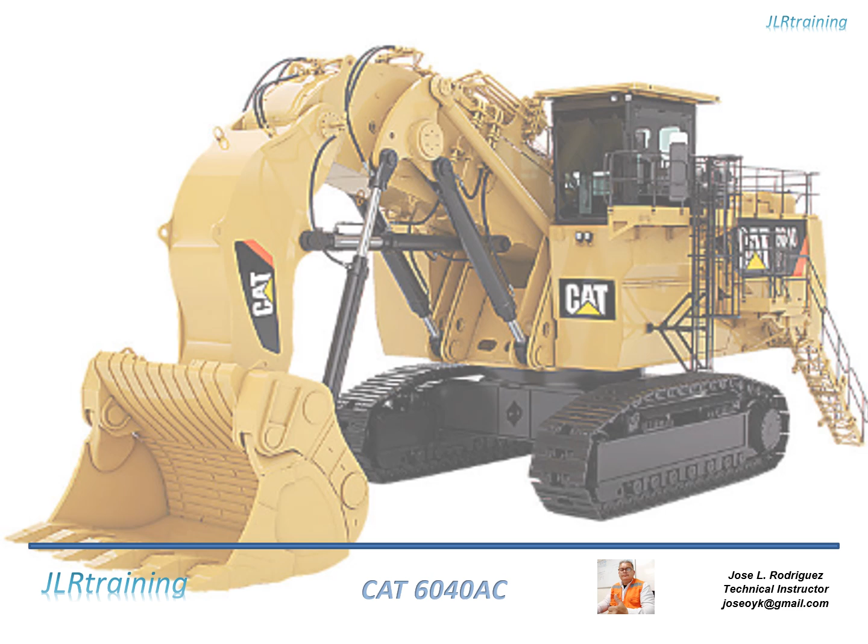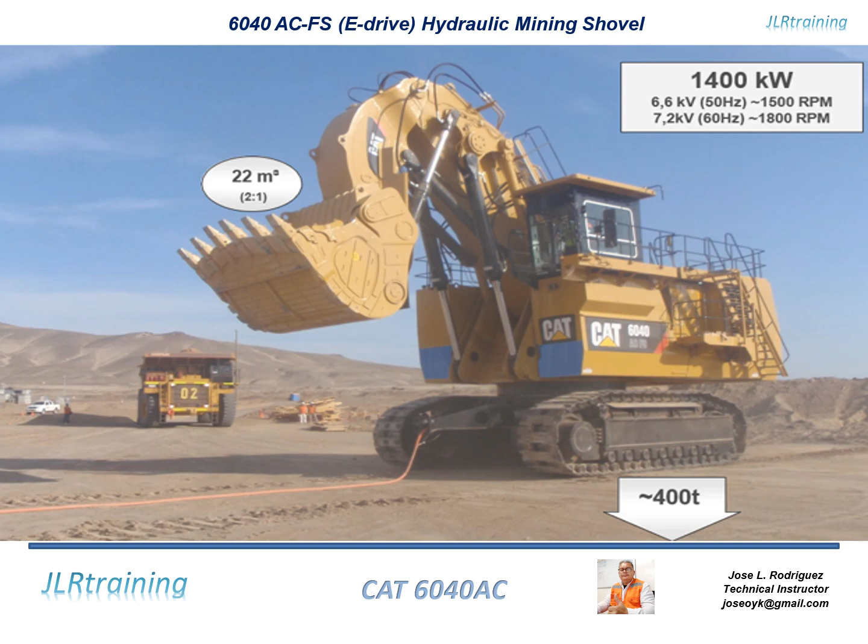This video explains about the Caterpillar 6040AC excavator, pumps, tanks and drive controller. 6040AC, FS, E-drive hydraulic mining shovel. Working dimensions.

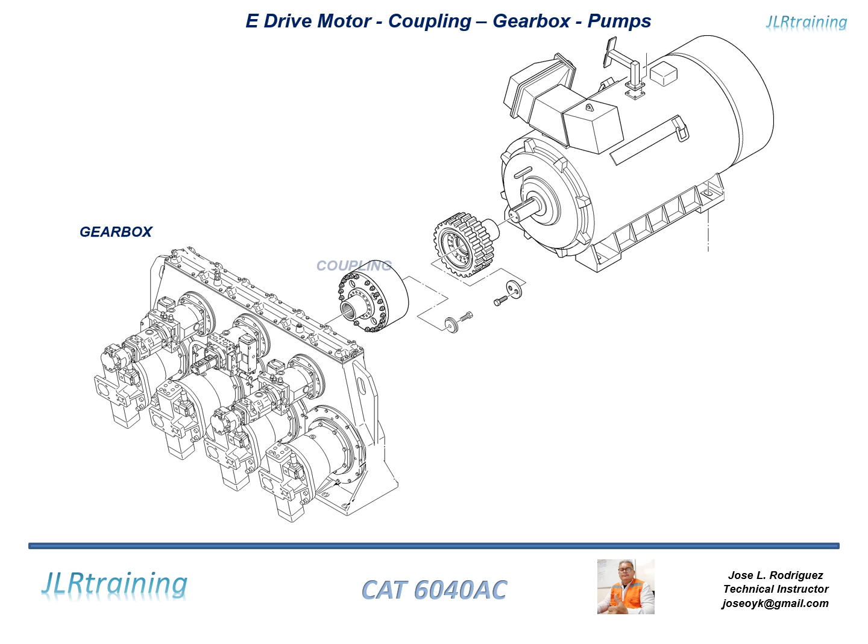E-drive motor, coupling gearbox, pumps. Gearbox and pumps.

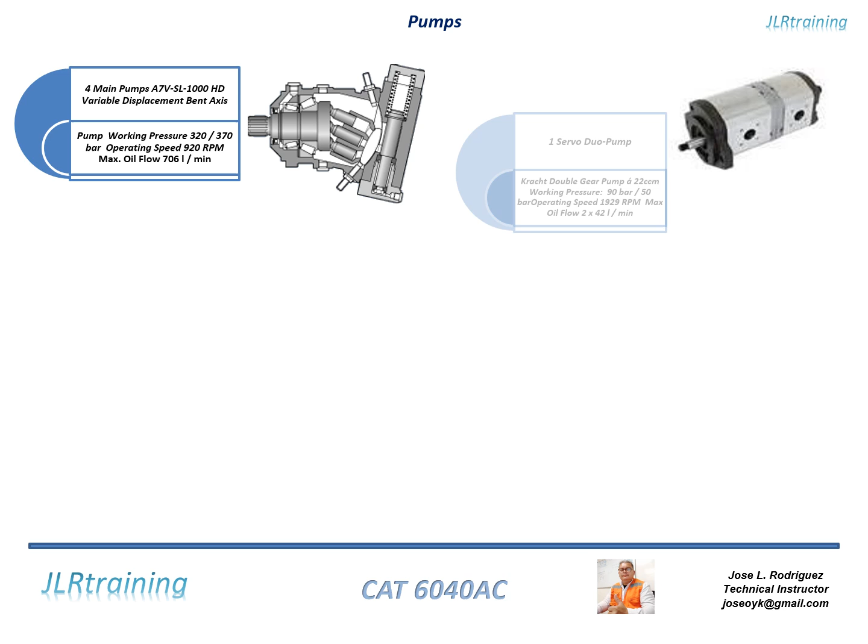Main module. It is the main module of the upper structure. In it is the electric motor, which generates the base power that is transmitted to the pump gearboxes, and the pump gearboxes generate the energy transmitted to drive the hydraulic pumps. The movement of the hydraulic pumps is produced to perform the operational movements.

This motor provides a power output of 1400 kilowatts. This motor needs a power supply of 7200 volts for its operation.

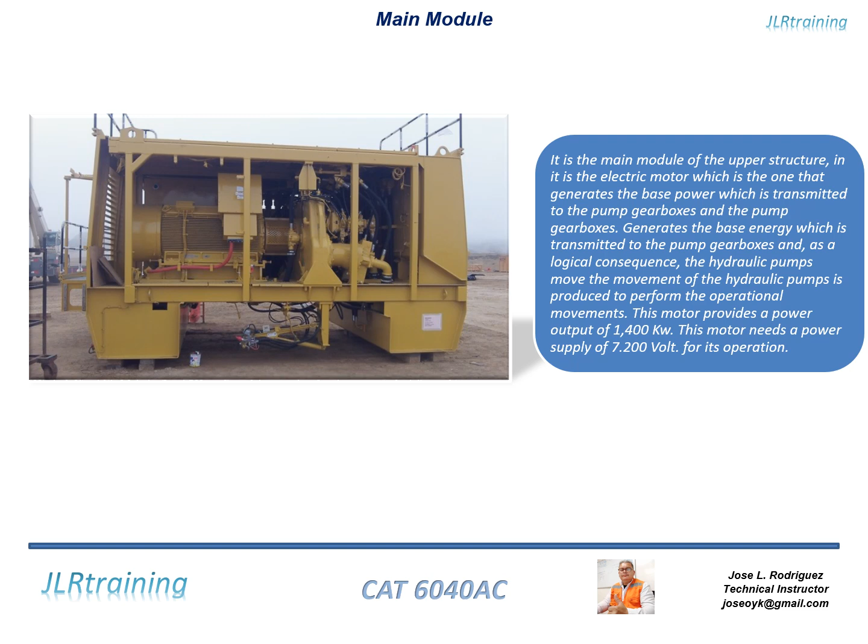Electric motor gearbox. Coupled to the electric motor by means of a coupling is a gearbox called a pump reduction box. As its name says, to this box are coupled all the pumps for the generation of hydraulic power. There are 4 main pumps that perform all the operational movements except the rotation, 3 turning pumps, 2 pumps to send hydraulic oil for cooling, and 1 servo pressure pump.

These boxes are lubricated and cooled by means of gear-type oil, whose characteristics are indicated in the maintenance manual, and the quantity is 149 liters. On its sides there are some rods to verify the level of this oil. To lubricate and cool this box has a pump that circulates the oil to maintain an ideal working temperature.

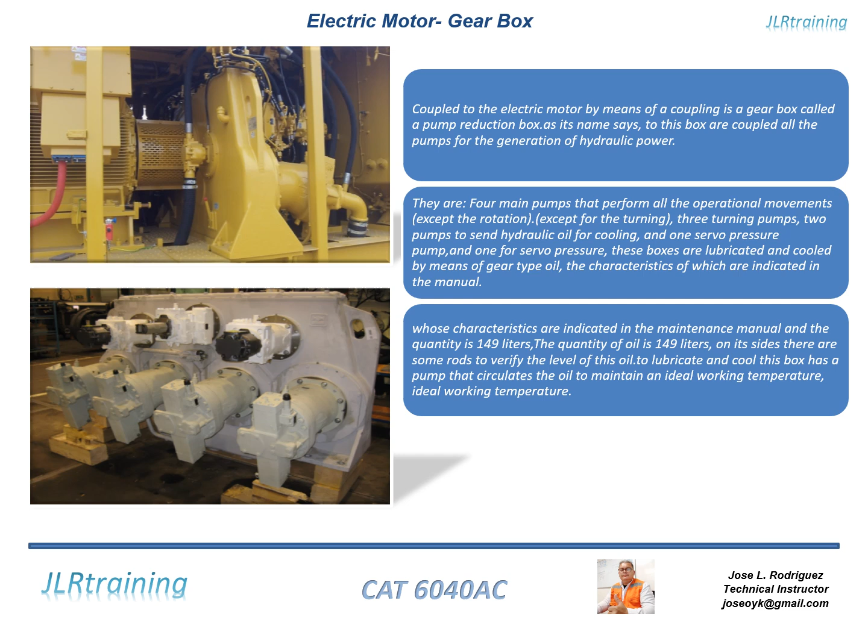Electric drive Siemens.

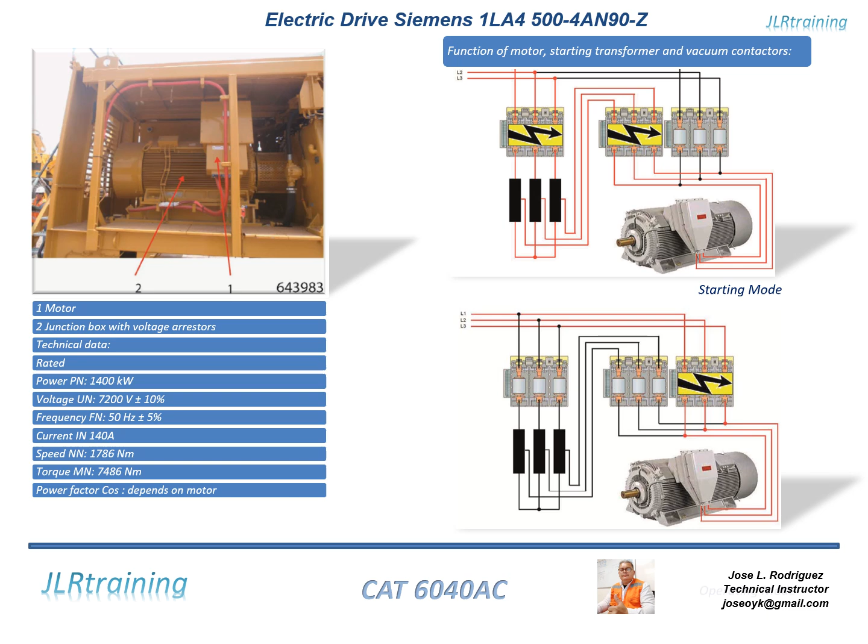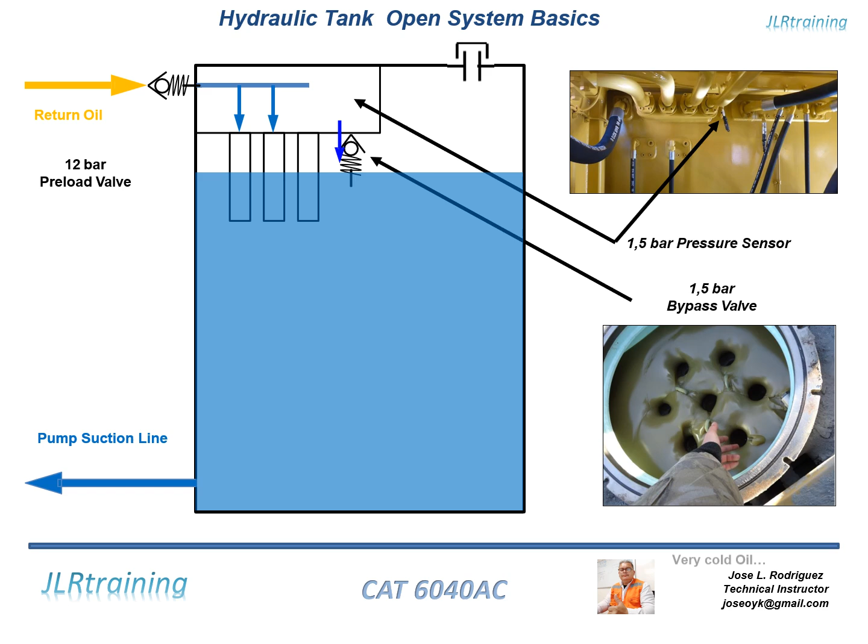Hydraulic tank open system basics. Tank.

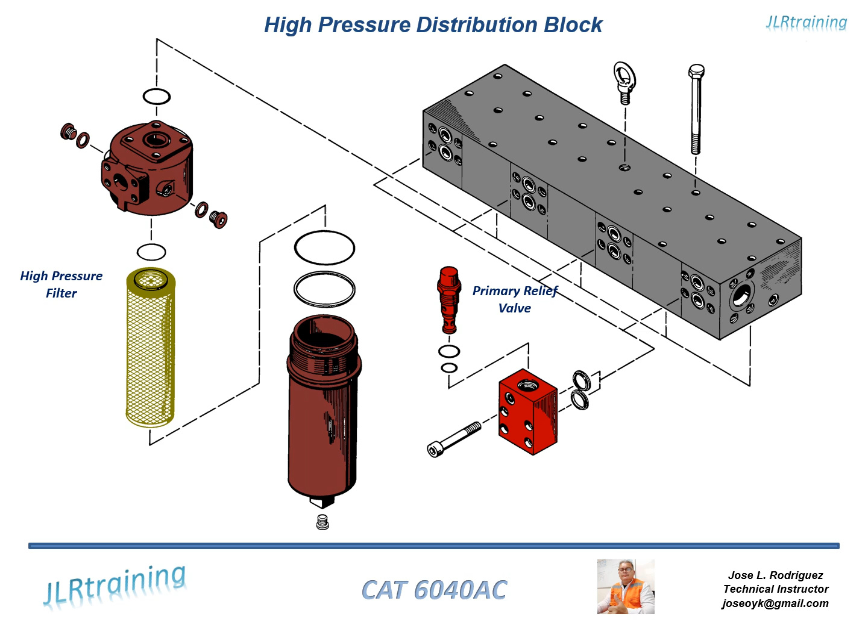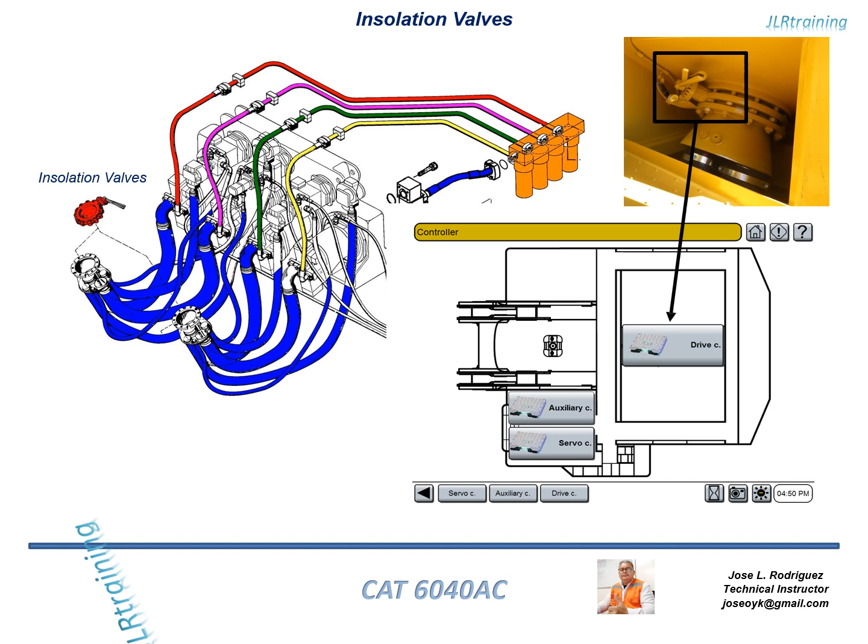High pressure distribution block. Isolation valves. Main pump.

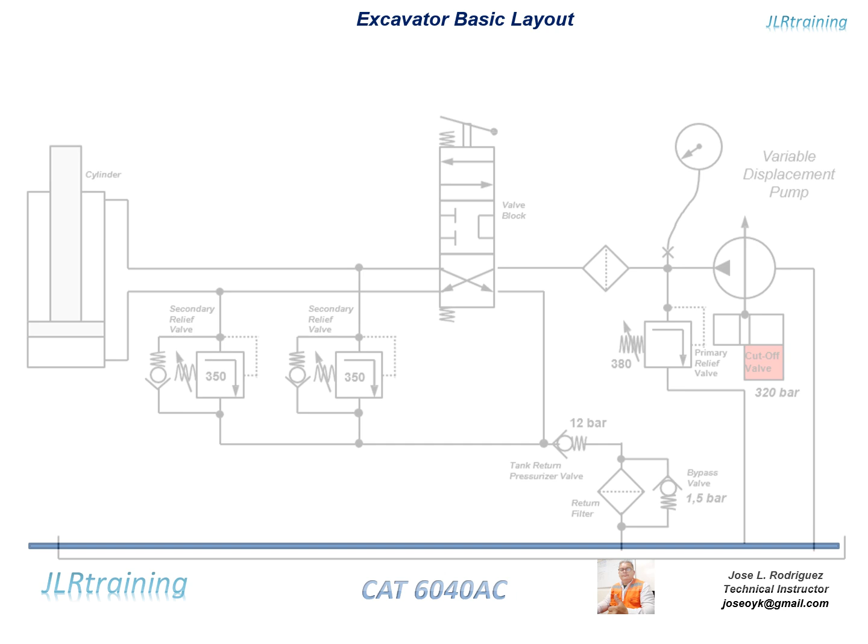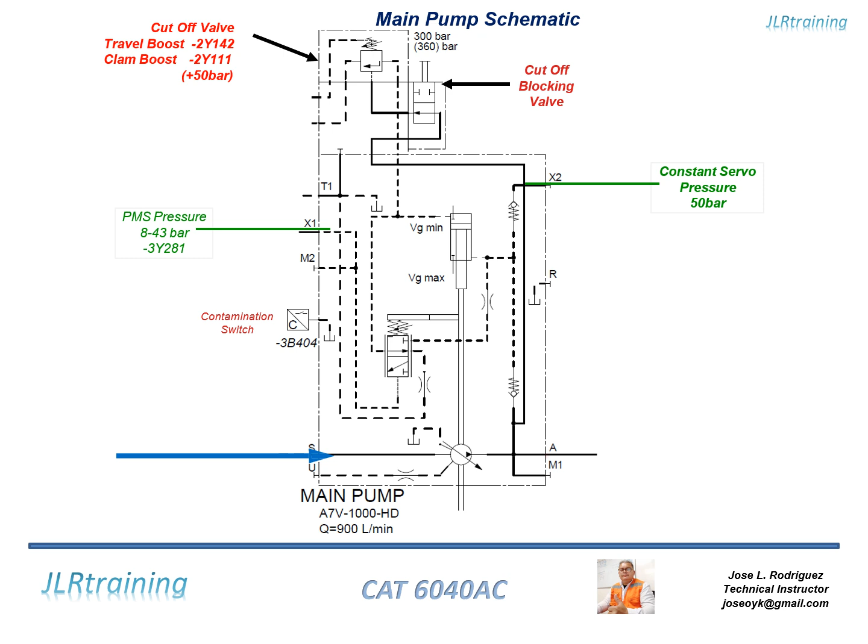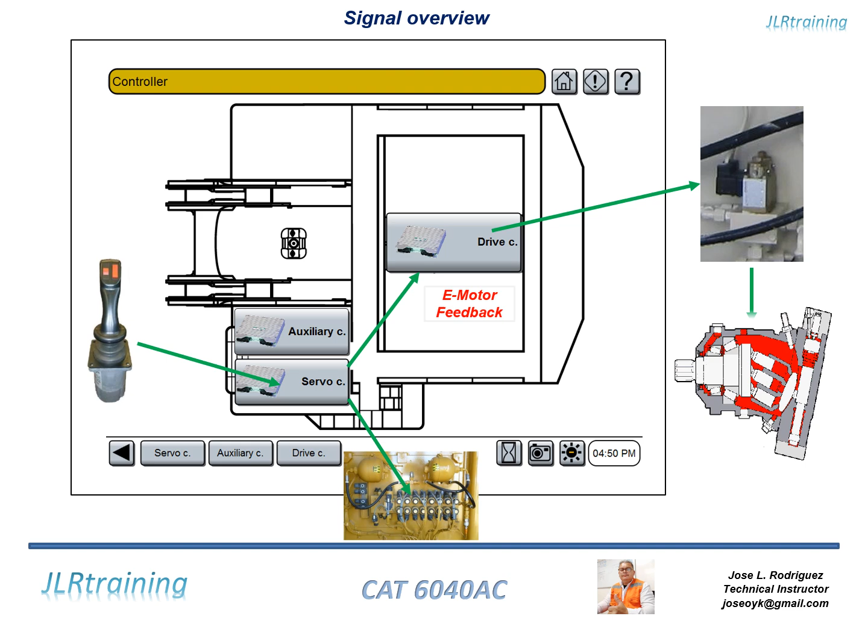Excavator basic layout. Main pump schematic. Signal overview. PMS pump management system.

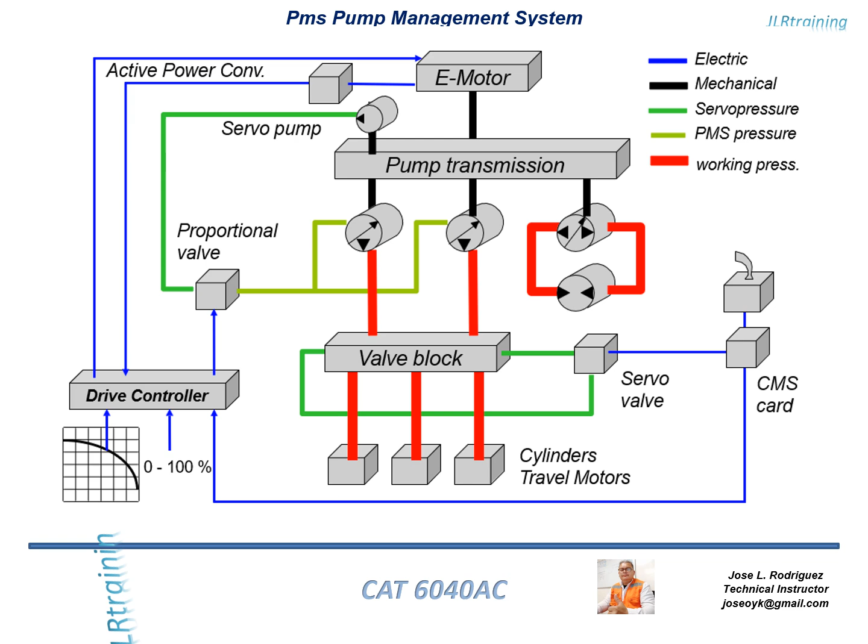Main pump in neutral. On startup of the motor, servo oil is delivered to the main pump proportional valve 3Y281 and the X2 port on the main pumps. The servo oil passes over the check valve and into the rod side of the control piston, assisting the spring and keeping the pump in neutral for startup and low idle.

With the control functions not operated, the pump management system supplies the proportional valve 3Y281 with 150 mA. This opens the proportional valve and allows 8 bars pressure to pass through into the X1 port of the main pump and onto the end of the control spool. 8 bars is not sufficient pressure to overcome the spring, so the spool remains in the closed position.

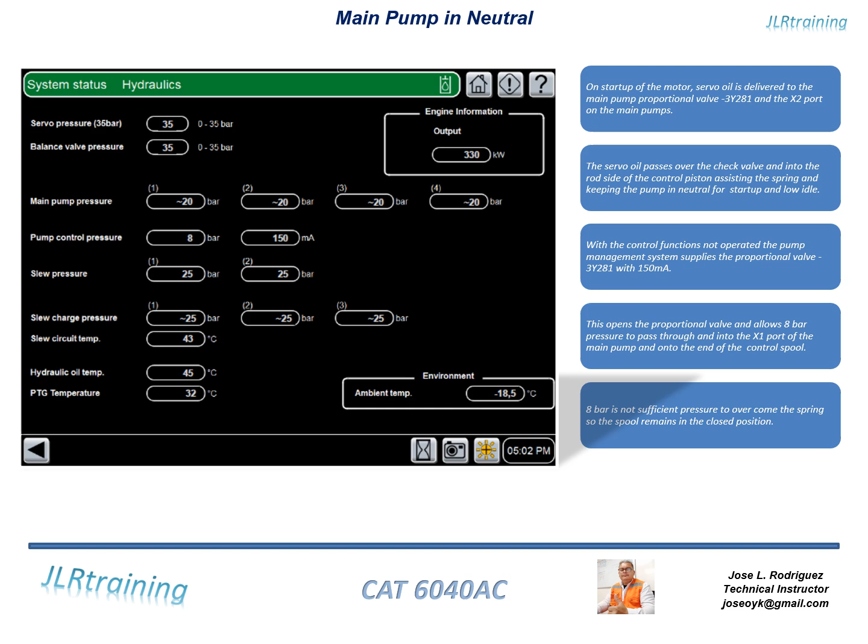Main pump in flow. With the motor running, the main pump is supplied with 50 bar servo oil at the X2 port and the pump is in neutral or zero flow. The proportional valve 3Y281 is also supplied with 50 bar servo. As the operator summons a function, the drive controller increases the mA signal, PMS current 225-820 mA, to the proportional valve.

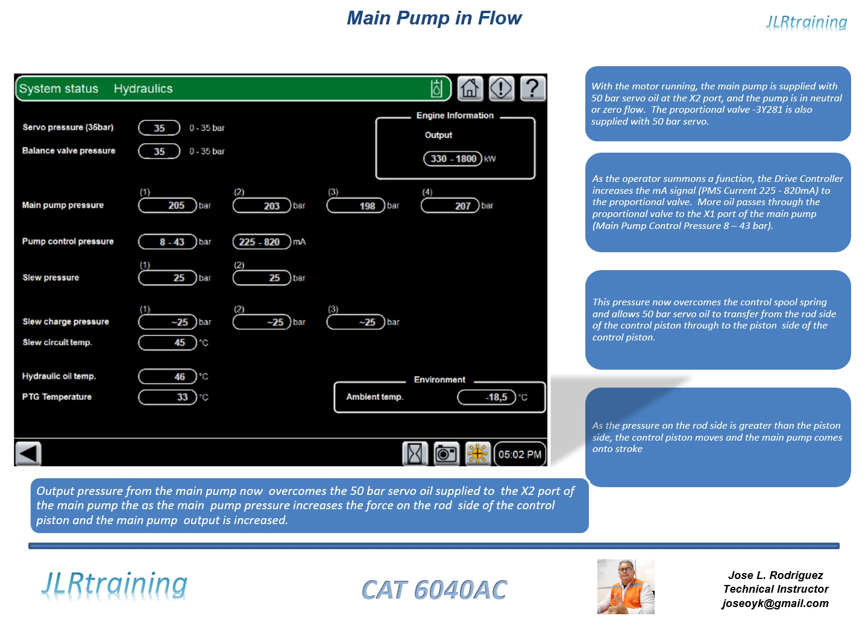The main pump comes onto stroke. Output pressure from the main pump now overcomes the 50 bar servo oil supplied to the X2 port of the main pump. As the main pump pressure increases, the force on the rod side of the control piston and the main pump output is increased.

Main pump pressure cutoff. A pressure cutoff valve is fitted to each of the main pumps for the purpose of limiting the maximum main pump output pressure to 320 bars for all working equipment functions and 370 bars for the travel functions.

The output pressure from the main pump is sensed at the pressure cutoff valve. The pressure cutoff valve is held closed by the spring, which is set to 320 bars. As the hydraulic system comes under load, the pressure in the output from the main pump starts to increase. When the output pressure reaches 320 bars, it overcomes the spring on the pressure cutoff valve.

The pressure cutoff valve now opens and high pressure oil is directed from the piston side of the control piston to tank. The rod side of the control piston is also vented to tank, however at a more reduced rate due to the orifice. The orifice on the rod side of the control piston ensures a pressure differential between the piston side and the rod side, allowing the pump to destroke.

The main pump is destroked, allowing the output flow to decrease to zero, but the maximum pressure of 320 bars is maintained. As soon as the load is removed from the hydraulic system, the output pressure drops and the pressure cutoff valve closes. Pressure is now allowed to vent from the piston side of the control piston, and the main pump is brought back onto stroke as the output starts to increase.

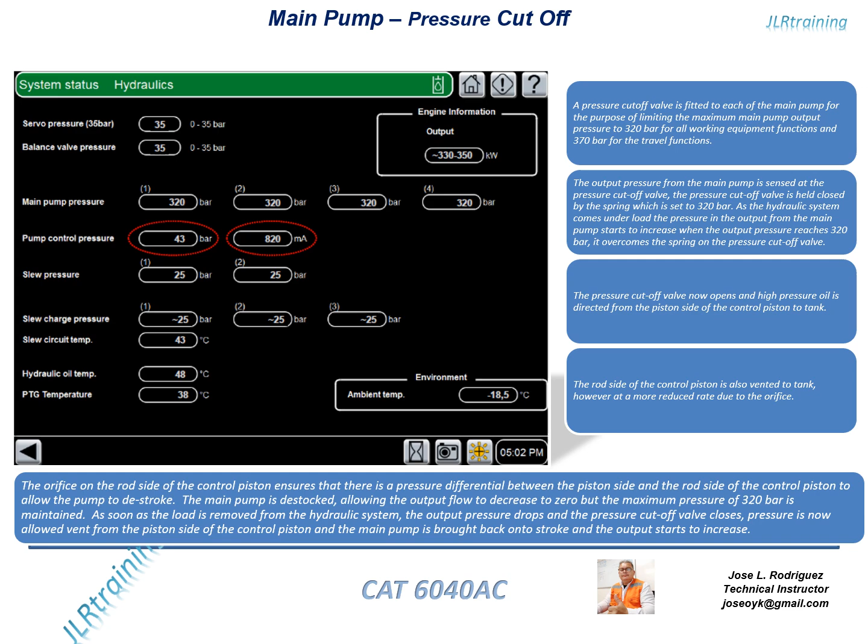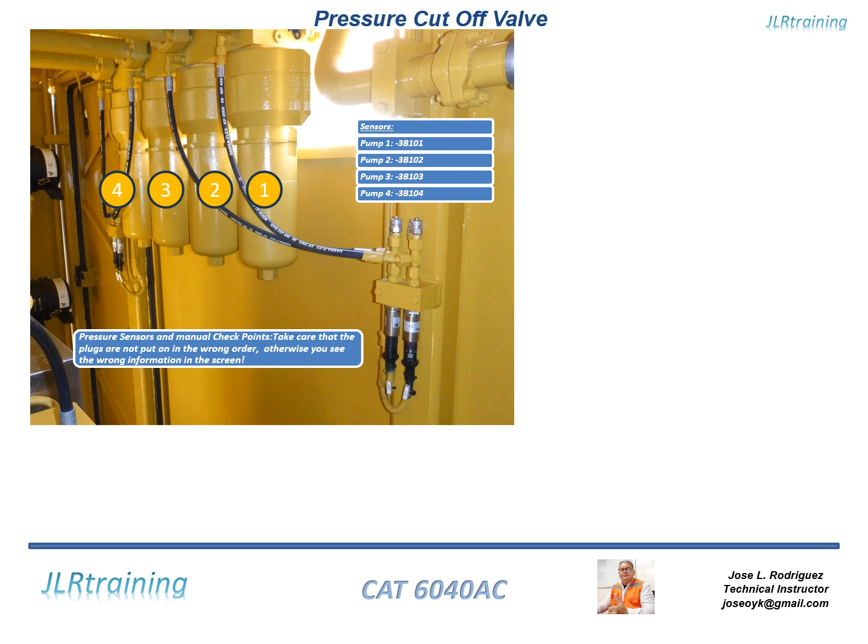Pressure sensors and manual checkpoints take care that the plugs are not put on in the wrong order, otherwise you see the wrong information on the screen.

Pressure cutoff valve P1. Gauges fitted to test points on high pressure distribution block. Left joystick fully deflected forwards to end stop. Stick extend function stalled. Pressure cutoff valve P1 set to 320 bars.

Pressure cutoff valve P2. Gauges fitted to test points on high pressure distribution block. Left joystick fully deflected forwards to end stop. Stick extend function stalled. Pressure cutoff valve P2 set to 320 bars.

Pressure cutoff valve P3. Gauges fitted to test points on high pressure distribution block. Left joystick fully deflected forwards to end stop. Stick extend function stalled. Pressure cutoff valve P3 set to 320 bars.

Pressure cutoff valve P4. Gauges fitted to test points on high pressure distribution block. Left joystick fully deflected forwards to end stop. Stick extend function stalled. Pressure cutoff valve P4 set to 320 bars.

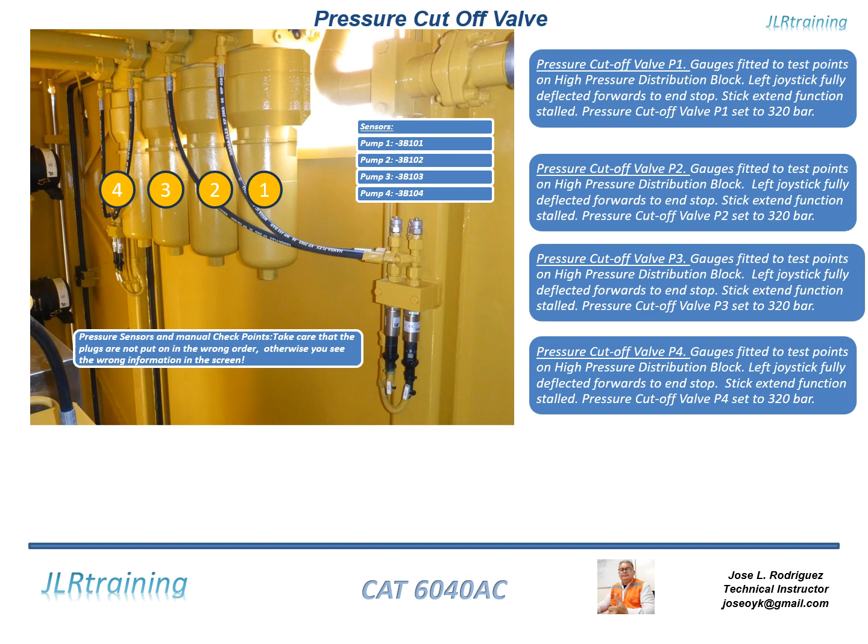Travel circuit. The pressure cutoff valve sets the maximum working pressure of the travel circuit, pumps 2 and 3, to 370 bars. How this works: the pressure cutoff valve receives a 50 bar signal from the travel pressure boost solenoid 2Y242 when the travel pedals are depressed.

This 50 bar signal enters the pressure cutoff valve and acts on the setting spring, increasing the setting value from 320 bars to 370 bars for the travel function. The same happens with the clam function if required, optional 2Y111.